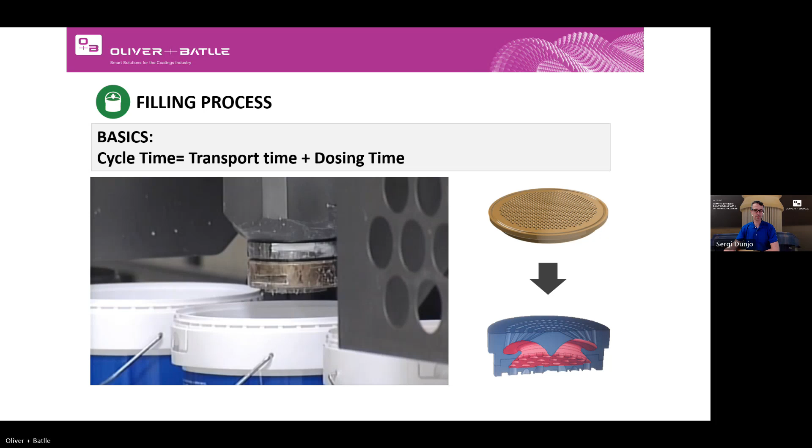On this slide, we are separating both processes as the main restriction, as we said, of the cycle time. On the left side, we can see the transport movement of the buckets during transporting over the conveyor track, and on the right side we can see only the filling process. Both of them are very important.

Today we can consider that the transport time, with the technologies we are using, is mostly at the limit. So if we are saying that the transport time is mostly at the limit, we only have one variable to play with to try to save time, and as a consequence improve by reducing the cycle time.

But to meet this challenge, we have to consider some of the multiple variables that we have on the filling equipment. We have variables such as the buckets and the tins. There is also another important factor, the product that we want to fill. In combination, both of these create some restrictions.

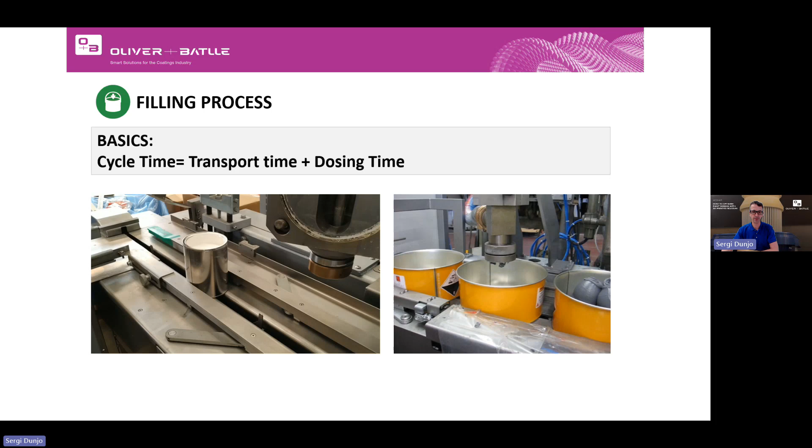Also, of that important restriction that we know from experience, there is a huge number of problems that for us is so evident as manufacturers of the filling equipment and using paint and coating technologies. We know that it could happen in the filling process, and these effects we have to control, because it's affecting how we will finish our filling process.

If we have air entrained in the paint, we can create splashes during the filling process, or even when we are running very liquid products, this pump effect, when we are closing the valve, we are splashing around the nozzles and creating splashes surrounding the bucket. The capillarity is very important to avoid creating any spot on the buckets in between the movement. This is not acceptable to have on the machines. All of these effects happen in our filling process, and we have to try to reduce it as much as we can.

Also, there is another effect that could be the foaming process in a very liquid process.

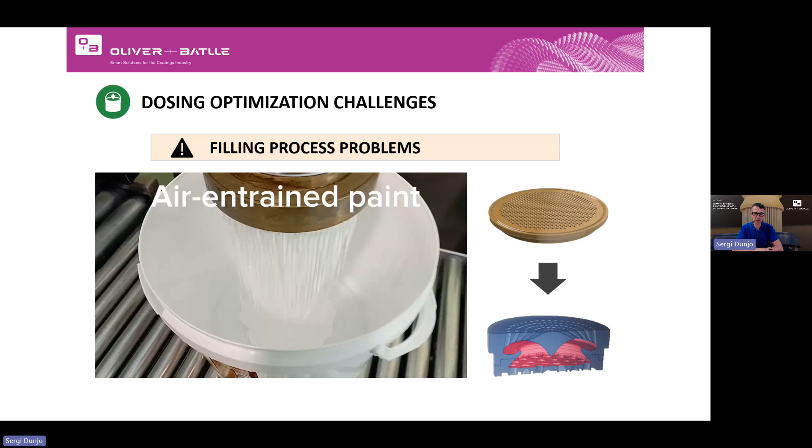All of these restrictions give us a challenge and a source of inspiration for how we can improve our technology or capacities to try to reduce all of these effects that we are showing you. It's evident that with the traditional manufacturing process we have, it was very limited, because there are a lot of restrictions using materials, using the machinery to get the final nozzle we are looking for. It's a barrier that we have.

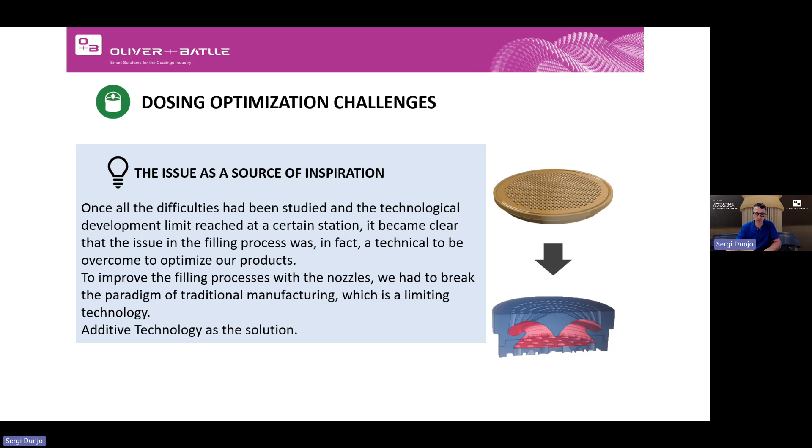After analyzing this challenge, we observed that maybe we can think about what we have in the market to apply to our products.

In the market there is 3D technology that is giving us a new world in terms of design and capabilities, because as we said before, the traditional manufacturing was so limited, but in the 3D additive manufacturing system, you can try to do whatever you want.

You will see later, this is a very nice sentence, but there are a lot of restrictions that mean you cannot do whatever you want. There are some limits that you have to take into account to get what you are looking for. But our basic goal was to try to use this technology just to adapt the designs for each need of our customers, to improve the quality of the final product.

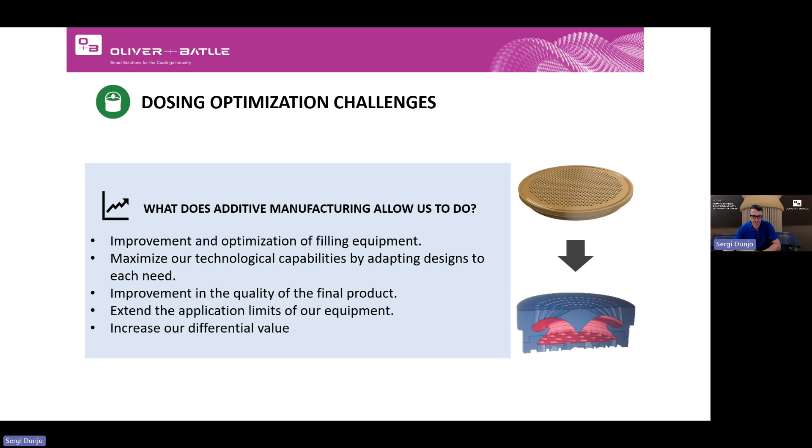So what we did is go to the market of 3D printing and check what are the current technologies, because this is a new potential solution, and we tried to use it as a challenge.

This technology in the market today is evolving so fast in terms of restrictions, materials, evolutions, and so on. We have to be really, really close to the market in a continuous loop, developing and researching potential new solutions, using these four technologies that exist in the market.

Fused deposition modeling, the FDM technology, is the most common technology nowadays. I think all people have at home at least one 3D printing machine just to fuse some small parts.

There is also the selective laser melting technology, which is basically used to produce 3D metal parts, and this technology focuses on that.

Then the stereolithography technology uses a pool with resin and a lamp, creating a product layer by layer. This technology needs to have some supports to avoid the part you are printing from collapsing while you are producing it.

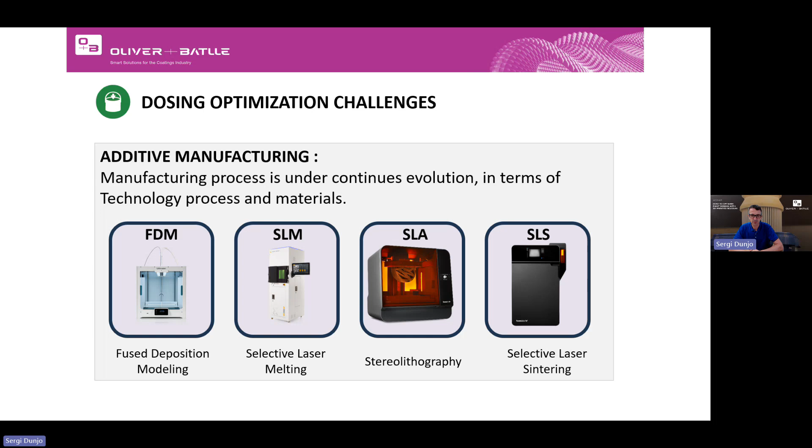Once you get this 3D part to final stage, there are restrictions based on the technologies currently in the market, and we have to select one of them.

This is what we observe: it was focused on the 3D printing market, and this is more reduced in our paint and coating market.

We have to take into account that we are handling products with solvents. We have to comply with ATEX certification or regulation to avoid creating gaps in the continuity of the material, and all these restrictions linked with the technologies create a high barrier in terms of technology selection.

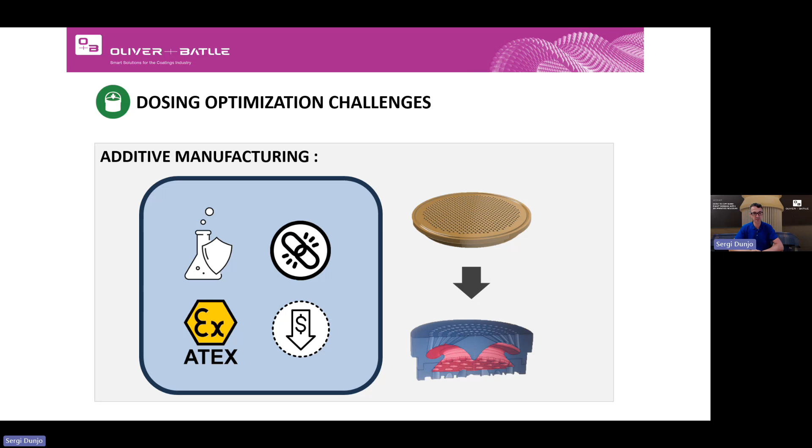Especially concerning the tubes creating the nozzles - if we select the wrong technology, we will not create perfect tubes to guarantee the capillarity process. So it's not an easy or evident decision to select which technology in the market should be used.

Let's focus on how we are designing and getting this solution from the 3D printing nozzles. We are making this schema, this 5-step process, to get the final result we are looking for.

The first step is the nozzle design. We are using a 3D system to develop our concept idea and model it on the screen. This modeling must be related to calculations we want to guarantee - sections, speeds, capillarity, viscosity - and all these calculations must be related with the nozzle design.

If this nozzle design is in accordance with the calculations, we move to the next step: simulation. We use a CFD simulation process, taking our principal nozzle design to create certain effects, which we want to check before printing the parts - verifying that what we have in mind matches what the CFD simulation system produces.

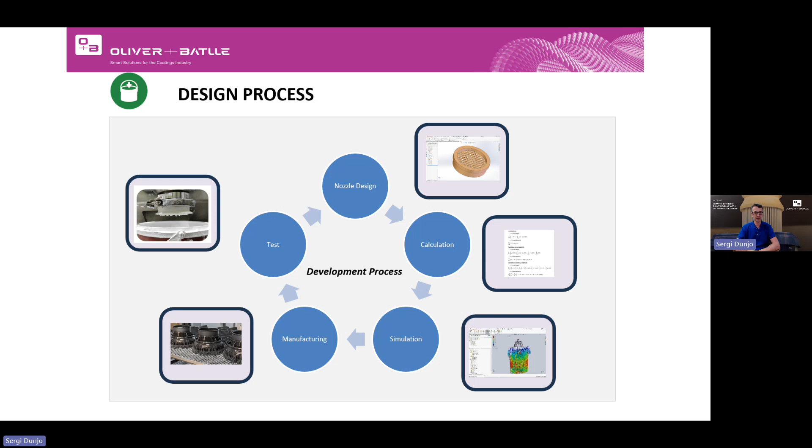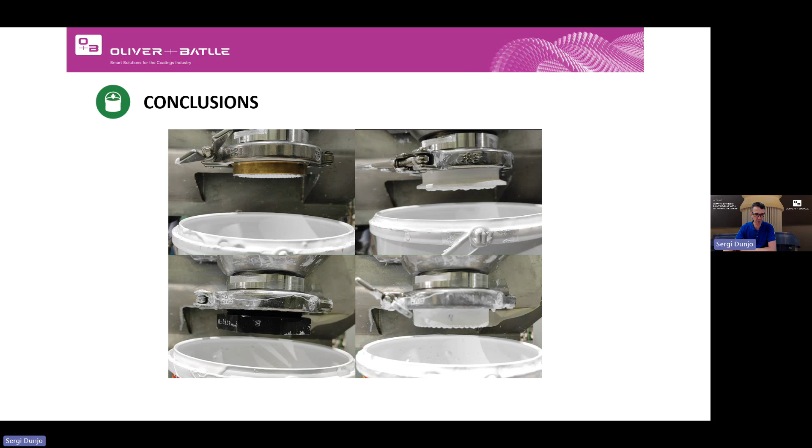Okay, I'll put it again. I think this clip shows how important it is—I repeat, same speed, same acceleration, same deceleration—how it's affecting the quality of the dosing. First point: the design. Second point: the speed. What we can do just by changing this part. This shows us how important the design of this technology is.

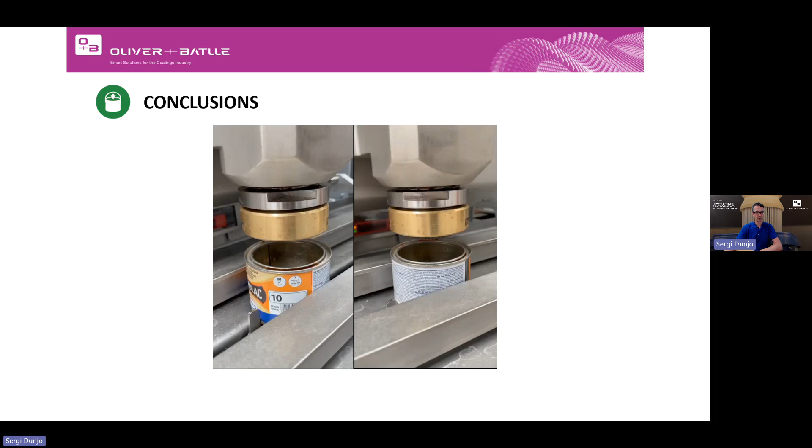The last slide we want to show you is one inquiry from a customer. They asked us to develop a new nozzle that would give the customer high quality coating of the paint. They are looking to guarantee a high quality process for the dosing, with no drips, and one that is easy to remove from one product to another.

And this is a clear example of how we can get quality according to the product, according to the bucket that you want to fill, and also according to the speed that you are looking for. These three concepts in balance give us results that with the traditional manufacturing system, we cannot get with the same quality we are observing right now.

I think that from my side, more or less, this is the part that we would like to explain to you, and it's very important, so I hope everything is clear. If not, you will have the time to make the questions that Carlos will transmit to us in a later stage.

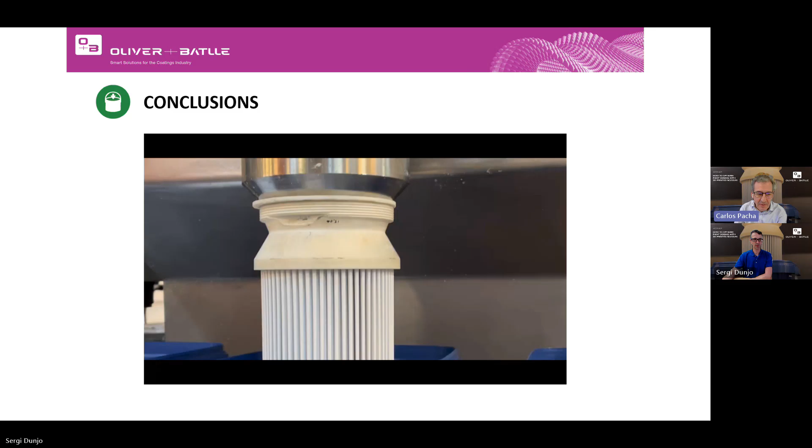Thank you, Sergi, thank you very much. Thank you to you, I found your presentation very, very interesting.

Thank you for that. So if I have to summarize your presentation in one or two sentences: you explained how 3D printing offers us new possibilities for customizing and improving nozzle designs beyond what's possible with traditional manufacturing. Secondly, you walked us through Oliver+Batlle's development and design process, highlighting how we integrate these technologies to create nozzles that improve dosing speed, accuracy, and reliability.

Hello everyone, I'm Sıla. I'm currently working as a chemical engineer at AkzoNobel Paint Company. I have a background in chemical engineering, and I'm based at our factory in Turkey, where I continue to build my professional experience. First, I would like to thank OB for inviting me to this valuable webinar. It's a great pleasure to have the opportunity to share the challenges we faced, as well as the successful solutions we've achieved, in a forum like this.

Today, I will be discussing a critical challenge we encountered in our production process and how close collaboration with OB enabled us to overcome this problem successfully. Before diving into the topic, I would like to briefly introduce our site.

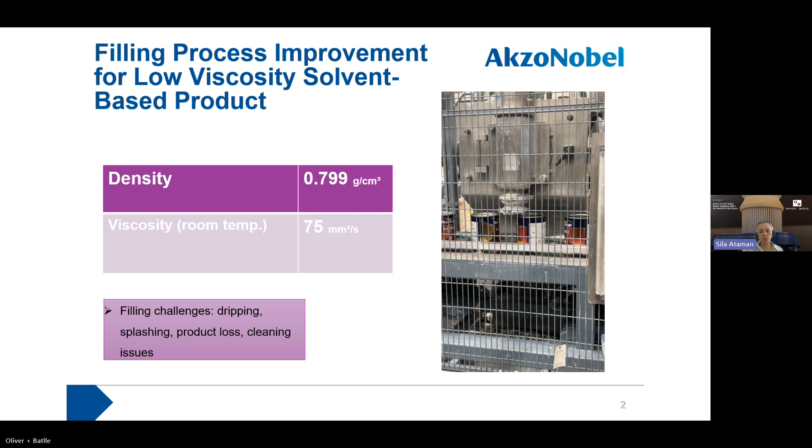During this period, we tested various types of nozzle designs, but none delivered satisfactory results. Neither changes in nozzle geometry nor adjustments in filling parameters managed to solve the problem. It was then that we reached out to OB for help. After a site tour and a detailed review of our process, their team observed our problem firsthand. Based on their assessment, they recommended testing their newly developed nozzle design. Could you please change the slide?

However, the OB design proved to be quite the opposite. These wires effectively control and interrupt the flow in a way that prevented splashing entirely, while also eliminating dripping. Thanks to the new design, the filling process became smooth, clean, and highly precise.

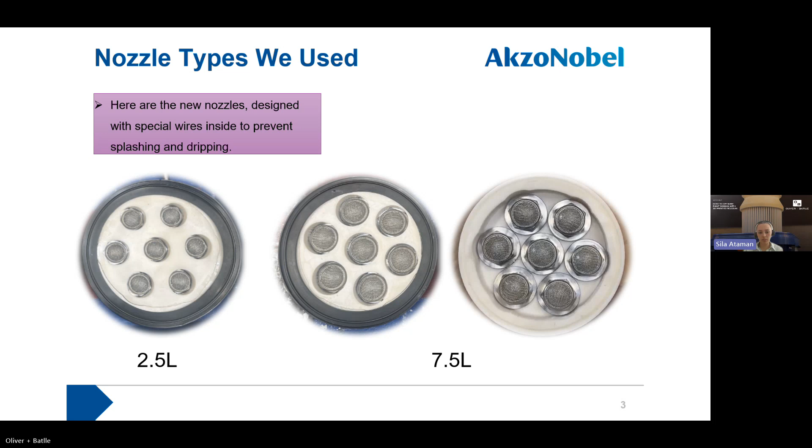I also prepared videos demonstrating the filling process with both nozzle sizes, as you'll see. The first one is 2.5 liters and the other one is 7.5 liters.

These results were incredibly satisfying for us. Thanks to this breakthrough, we are now able to fill our low viscosity solvent-based products reliably without any complications. Furthermore, the cleaning workload on the production lines has been greatly reduced. Product losses have been minimized, and the overall quality of the filling operation has significantly improved.

Now we are also planning to extend our trials to similar nozzle designs on low viscosity products in the water-based area.

Finally, I'd like to emphasize that this remarkable improvement was only possible thanks to the strong and constructive cooperation we had with OB throughout the process. I would like to thank once again OB for their technical expertise, innovative solutions, and ongoing support. It's been a great opportunity for me to share this experience with you today. Thank you very much for your attention and interest. From my side, I think that's all.